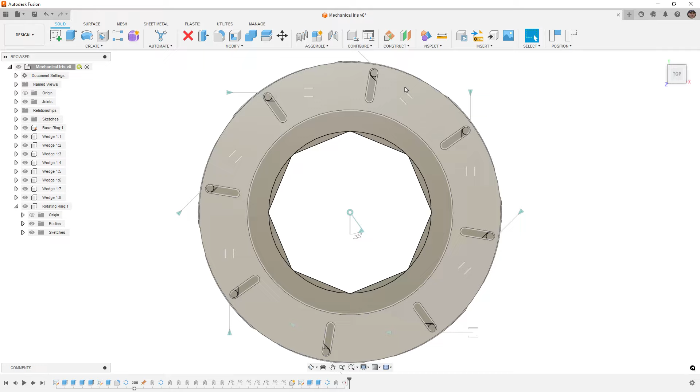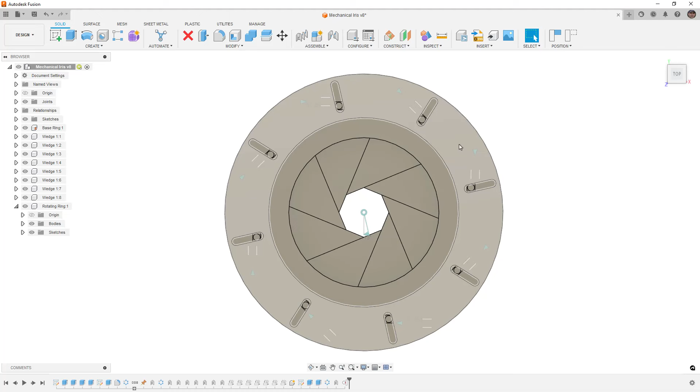This one is looking at these petals that sort of nest to each other. Some of them, like camera irises inside of lenses, will actually have these leaves or petals that overlap. And there are other kinds that have 4-bar linkages and all kinds of different things in it. I picked this one because this is probably the easiest to model and understand.

That way we're not so bogged down on having to worry about things like math and figuring out all these sort of arcs and motions. So we're going to make this one here, and if we want to in the future, maybe we'll make another one that's a bit more complex. But let's go ahead and get started with this.

So we're going to begin a new design. I'm working in the metric unit system. If you want to work in inches, perfectly fine. It's not going to make a difference to this design. Just adjust your values accordingly.

We're going to get started with a new sketch. And this is a part of the design that I get a lot of questions on. People ask kind of about workflow. Do you make all bodies and convert to components? Do you make all components early? And kind of it depends. And I say it depends because it does.

Now, there are different CAD programs. If we're using SolidWorks, for example, then if we wanted to do all bodies, we would do a master model inside of a single part file, and then we would save those bodies into their own files and into an assembly. That workflow is something that I've done for many years, and I actually enjoy it in Fusion as well, making the bodies and then converting them to components.

But there is, of course, a nuance there. If the components are going to be extremely detailed, and what I mean by that is if the features and sketches take up the entire bottom of the timeline and you end up having to scroll back and forth quite a bit, or if there's a lot of interdependencies, those are two main things that would drive my decision one way or the other. For the mechanical iris here, the geometry is simple, the number of features is fairly simple.

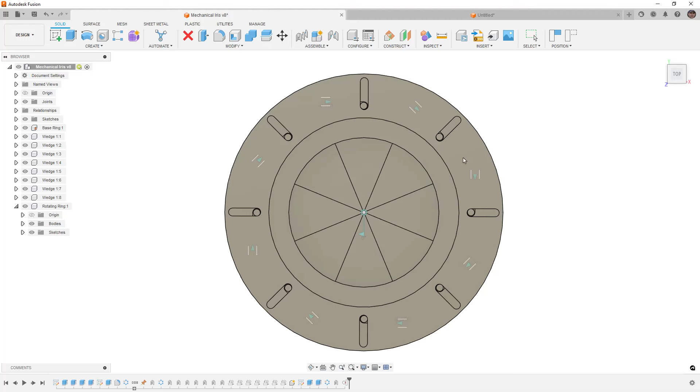So we don't need to go into making components early on. Is it going to affect what we do here? Not at all. You can certainly start out making components. I am going to begin by making bodies just because of the way that this design works. I think it's a little bit easier.

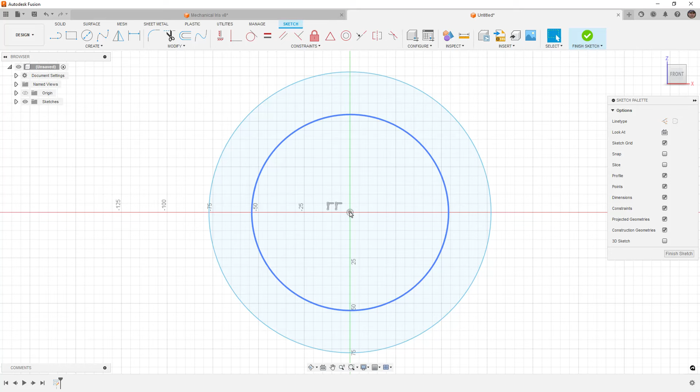So we're going to begin by creating a center diameter circle, and I'm going to create a second one, and we're actually going to hit escape, and then we're going to add some dimensions. We're going to start by giving the inside one 100 millimeters, and the outside one is going to have a distance between the two. I don't know what the numbers are that we need, but these wedge pieces or these blades need to be completely hidden inside of here.

So you can kind of plan and figure out how much space you need based on the fact that we've got essentially 50 millimeters here, and we need to completely hide that over in the side here. Now it's not one-to-one because we can't just take this distance of 35. If we were to have a triangle here, and what I'm going to do is I'm just going to make one here.

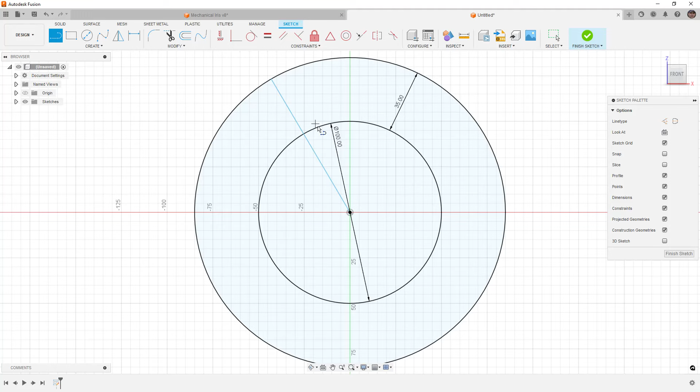I'm going to put a vertical line, hit escape, and make this construction. Now there are shortcut keys, X on the keyboard for that. Let's go ahead and select the left line, the right line, and the center. Select the center last and use symmetry.

This allows me to move these around. And then we're going to give these a dimension based on the number of petals or leaves that we want, so 360 degrees divided by the number that you want.

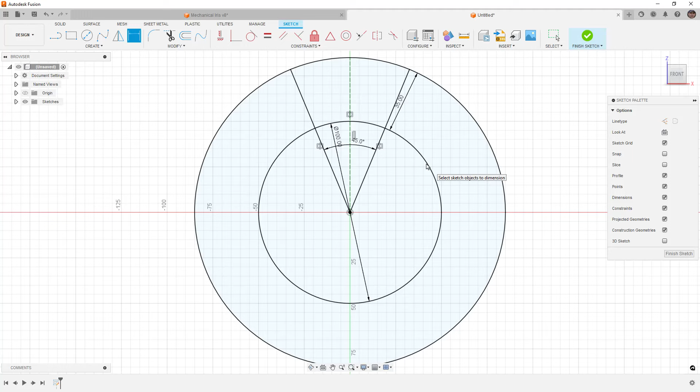I'm going to use 8 for this example. We could use more or less, that really depends on what you're doing. 8's a good number. The more you add, the more joints you'll have to add to make this work mechanically. The fewer you add, the simpler it becomes. So if you want an easier one, just reduce that number.

So now we've got this wedge shape, and what I'm going to do is select these two lines and hit M on the keyboard, which is move copy. I'm going to create a copy, and just drag this out to the left. So this is the direction that this piece is going to be moving, and what we need to think about is how far we're moving it.

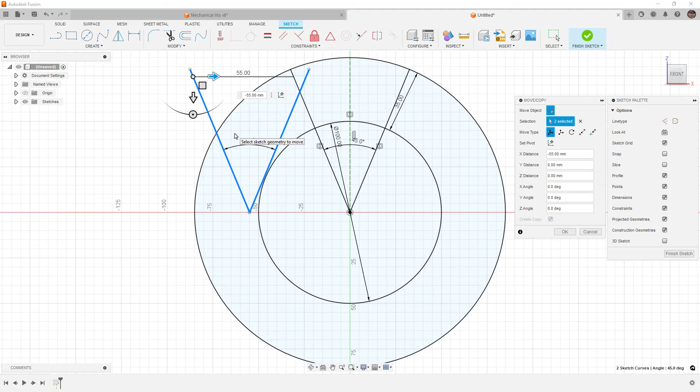In this case, it looks like 55 millimeters will completely hide it, and whether or not we can completely hide everything inside of that shape. We're not going to keep this, so I will be deleting it, but just keep in mind that what we're going to be doing is creating this wedge piece that's going to move off to the side.

Now, if I add another arc from here to, let's say, there, and I'll make these two concentric, basically that's going to give me that little wedge piece. I'm going to undo this. I just wanted to do that as a visual representation of what we're doing.

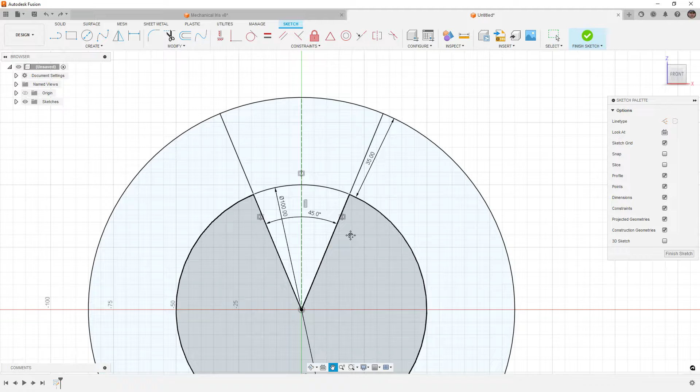Because we're only going to be working in this upper section here, these two quadrants, I'm going to zoom in a bit. So now this is our wedge piece, and it's going to be moving off to the left. To make that happen, we're going to add a slot.

So create slot center to center. We're going to go from this vertical line here and just off to the left, and I'm going to give it a value of 5 millimeters. It's going to be big enough for what we need. There's going to have to be a pin that fits between this wedge piece into that slot.

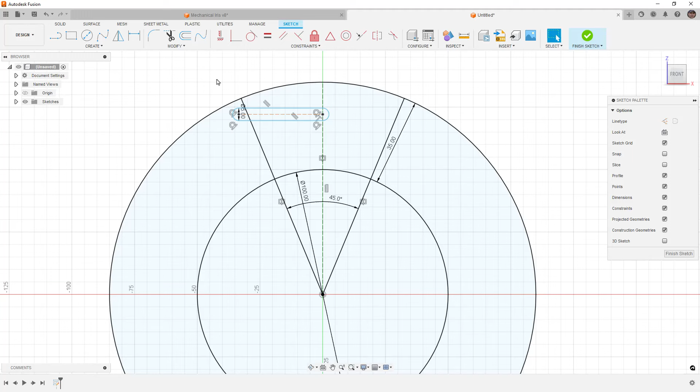Now, there are a couple of other important things that we need to think about here. I'm going to add a couple more circles, and hopefully this will be clear. From the origin to this point, and then the origin to this point, hit escape, and convert both of these to construction - again, X on the keyboard, or click line type construction over here.

Now, what I mean here is that this diameter is going to affect the length of the slot. It's going to affect how far that piece moves in and out. And these numbers are important because when we make our secondary slot for the top ring that's going to move, that secondary slot is going to go from this position and it's going to go vertically until it hits this circle. So that's how we get our two dimensions.

This left-right one is going to dictate how far that wedge moves left and right, and the vertical one is going to dictate the pin moving along this slot. So we're going to use one pin location to help drive this, and then the intersection between all of the other pieces to make this work.

So what we can do is define the diameters of these, again D on the keyboard for dimension, and I'm going to say 140 millimeters, and let's go to this one and say 160. I don't know if these numbers are going to work - we can always come back and change them.

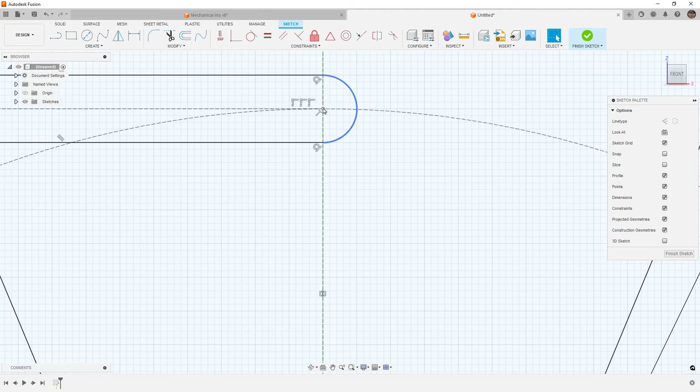And the last thing that I want to do here is add a circle, and we want to make sure that we're centered. So we're going to go at the center point here. We're not going to make it exactly the same - I'm going to make it 4.5 millimeters.

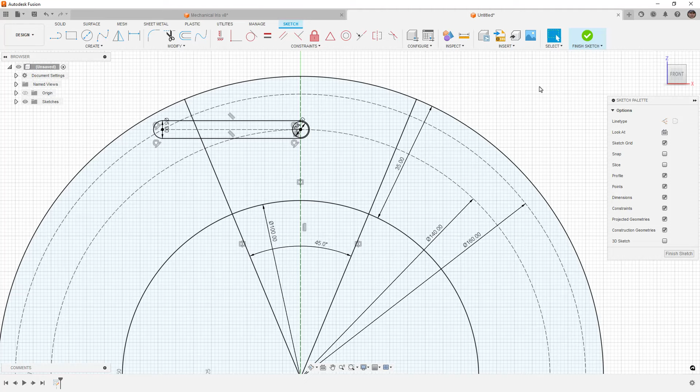If you were to 3D print this, or if you were to try to manufacture it, then obviously you need to think about the tolerances that you have available to you. If you're using a 3D printer, it's generally plus or minus 0.1 to 0.2 millimeters. My printer actually prints undersized a little bit, which can be difficult if you're trying to get things like hole sizes for bolts and pins, but those are the general numbers that we have to work with.

So now that we have this, we also need to think about the bit that we're going to cut away from the outside of this wedge piece. That bit, we're not really sure. Again, moving it off to the side 50 millimeters gave us a good idea of what that would look like. But I'm going to add a few more dimensions. I want to see what this travel is, keeping in mind that this is a driven dimension - basically we can't add this dimension, it's already defined. I also want to know what the outside diameter is as well. Once again it's driven, so now we know 170 on the outside and 38.73 is the distance.

So what that means to me is that if I take an arc and I go from here, it's probably not going to come up to that corner, but somewhere around here. What we want is this radius and this radius to match so we can make them equal.

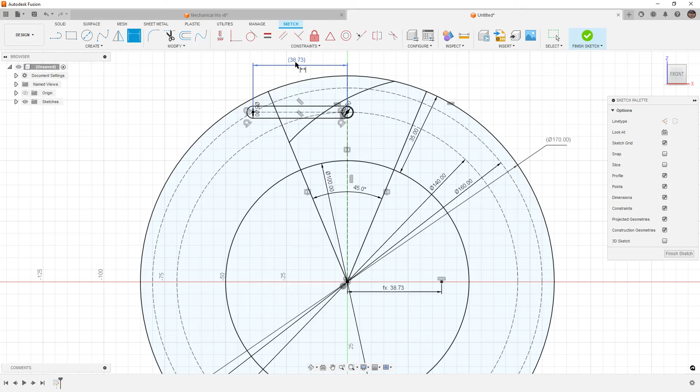I'm going to hit escape, and then we're going to drag it down. Then what we need to do is figure out the distance from this origin to that point. So if I select this point and select the origin and make them horizontal, and then use D on the keyboard to figure this out, this value should be approximately the same as this value, 38.73. What we could do is click on it and set those equal. Even though this one is driven, that is going to automatically update that little wedge piece.

Now we'll have to do some testing and figure out if it actually will work in reality, but this is where these numbers are coming from.

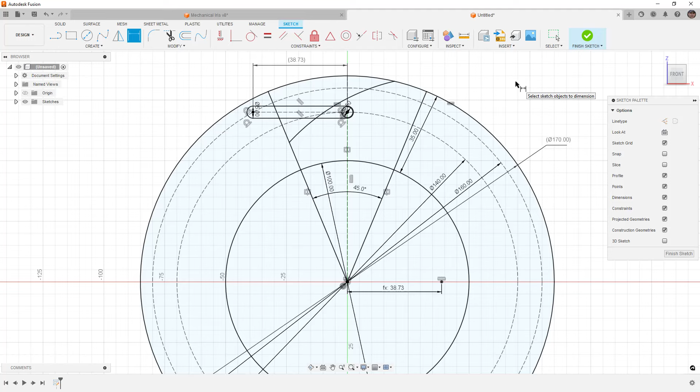Now, I know the sketch is a lot, but for me, at least as I'm designing things like this, it's easier to put a lot of this in one sketch because we can move and copy bodies around or copy these sketch lines around and give us a good idea. We'll have to come back and make the ring, the sliding ring, in a separate sketch.

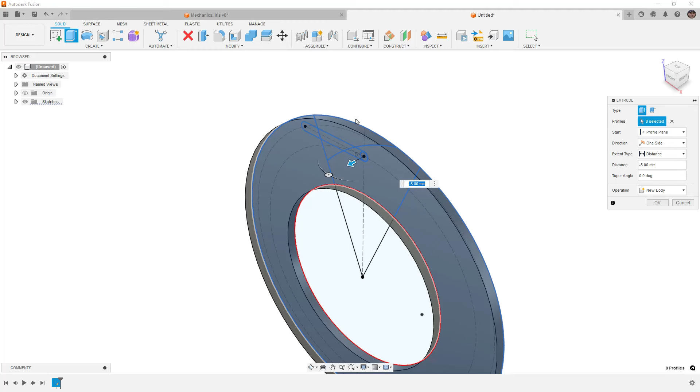But we're going to start by sort of shift selecting everything and then we're going to extrude it. You can use E on the keyboard. I'm going to pull this forward - let's go ahead and just do, I don't know, -5 millimeters.

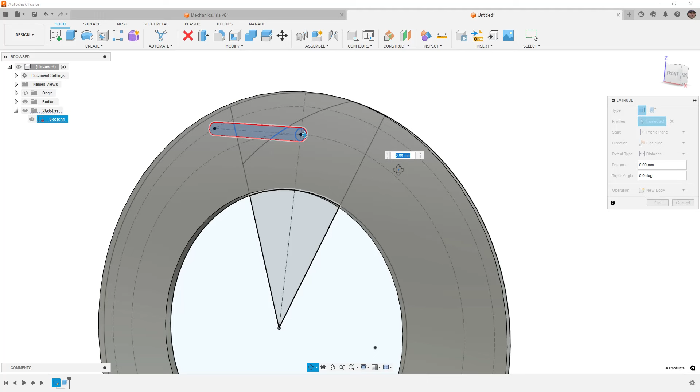Bring the sketch back, and now we're going to cut the slot in it. The reason that I like to do it this way is because it makes patterning the feature a bit easier. You don't have to do it this way - you could pattern the faces and it would work just fine if you wanted to just do that single extrude. But I like to keep these things a bit separated, even though it adds more features to the timeline.

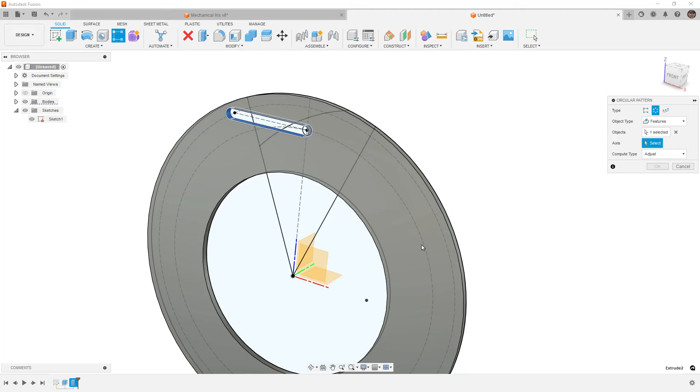We're going to do through all, say OK, and now we can pattern that. So we're going to do a circular pattern of features. We're going to select that extrude cut feature, and we're going to pattern it about the y-axis, so we can either select that or a cylindrical edge. Then we're going to add the number of pieces we need. Again, depending on how you define that wedge piece, whether it's 6 or 8, that's how we're going to get those numbers.

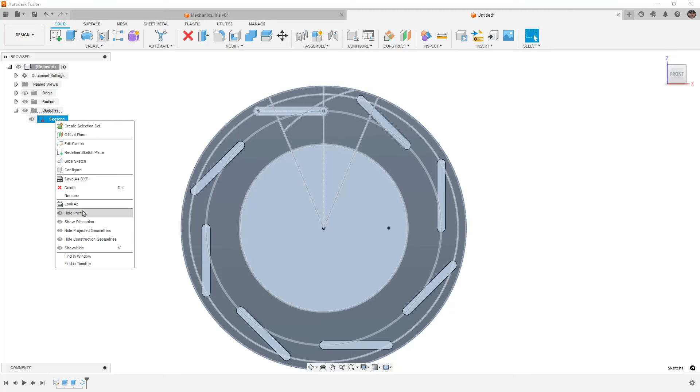So if we go back to the sketch, right-click and show dimensions, this dimension here was 360 divided by 8. That means that we're going to have 8 of these wedge pieces. So that's why I chose to pattern this 8 times.

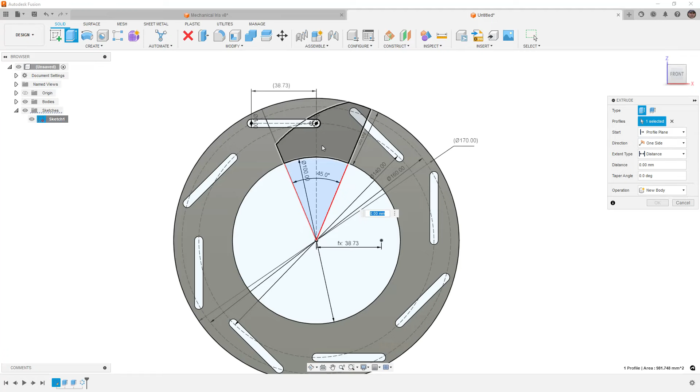The next thing that we're going to do is we're going to extrude that wedge piece. So again, E on the keyboard. I'm going to hold down Control, and we want to extrude all of that. I'm going to make this go the opposite direction.

Keep in mind, when we're designing this model, if you were to actually make this, there are more pieces that you would need to do, right? So we're looking at the kinematics, the mechanical motion of this part. We're not putting all the little details together to actually make it ready to be printed. If you want to carry on and do that yourself, you certainly can. It's not much more than we're going to do, but it will just make the video quite a bit longer.

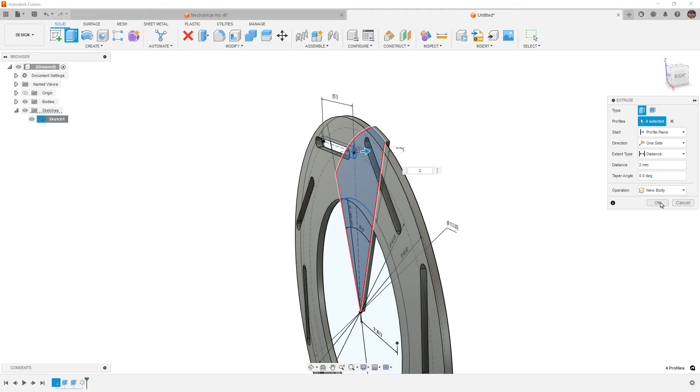So we're going to make this a new body. We're going to hit E again for extrude. Also, you can use the right-click marking menu, and the 12 o'clock position is repeat. So I like doing that, especially if I'm doing something over and over again that doesn't have a shortcut.

You just hold the left mouse button down and drag up. That's a quick way to get back to that extrude feature.

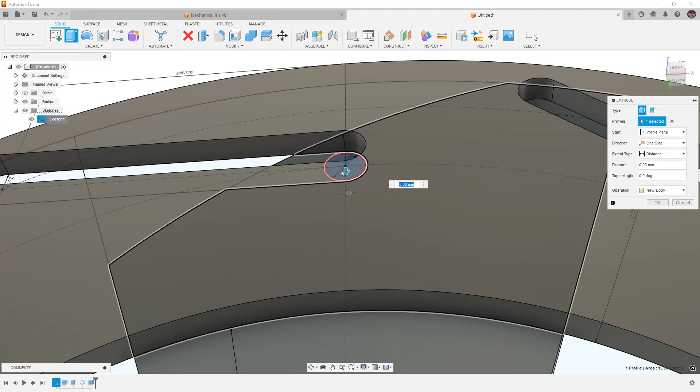So this pin is going to come up, and I'm going to make it come up 8 millimeters. That'll allow it to go into the next ring. And because it's undersized, it's not going to try to join it to this body. But one thing I would caution you in Fusion is if you're going to be joining features together, then make sure that you hide any of the other bodies you don't want to connect it to.

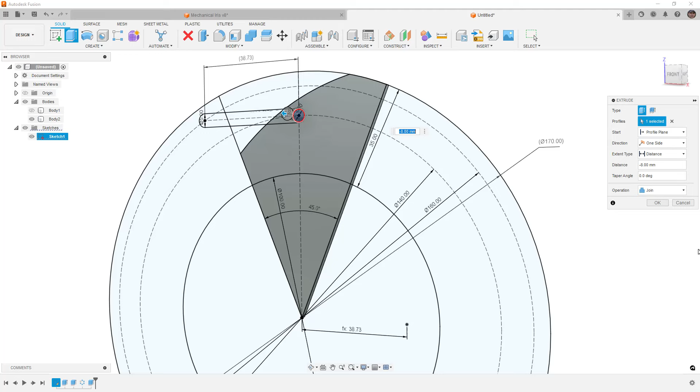So we're going to say OK there. And we'll bring that body back and hide the sketch. At this point, I want to add a couple of fillets. Maybe we'll get this edge, and that one, and just round them off. They don't need to be extreme, we're just going to kind of cut the edges a bit.

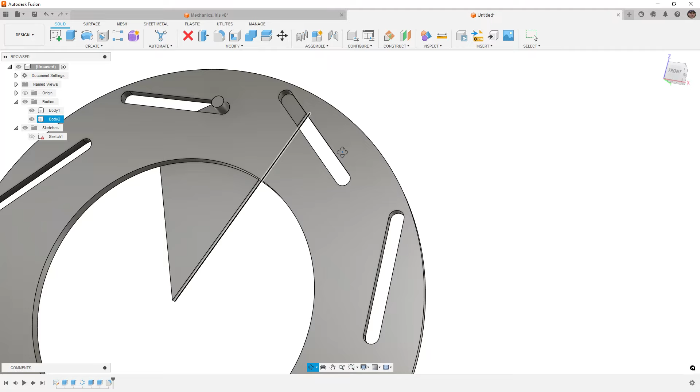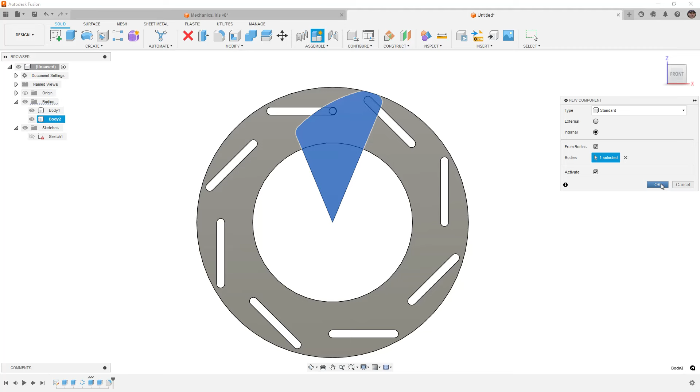Now we want to kind of test it out. So this body here is going to be stationary. It actually does not need to be a component. You can convert it to a component and pin it or ground it. They changed the name of ground to pin now. But this one definitely has to be a component. So we're going to just start by converting that one to a component. And we'll say OK, and then we're going to add an as-built joint.

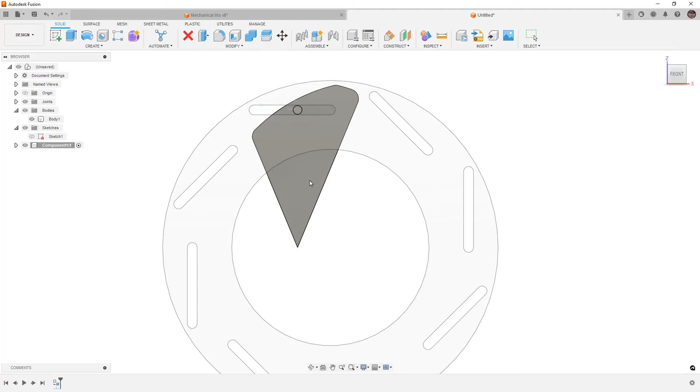So we're going to use a slider joint between this and along this edge here. Currently, it's completely open, there are no motion limits, and I'm going to leave it like that for now because I basically want to evaluate what's happening here. So because we use the numbers, we can see as we pull this all the way to the outside that it is matching the outside shape. That's perfect, that's exactly what we wanted.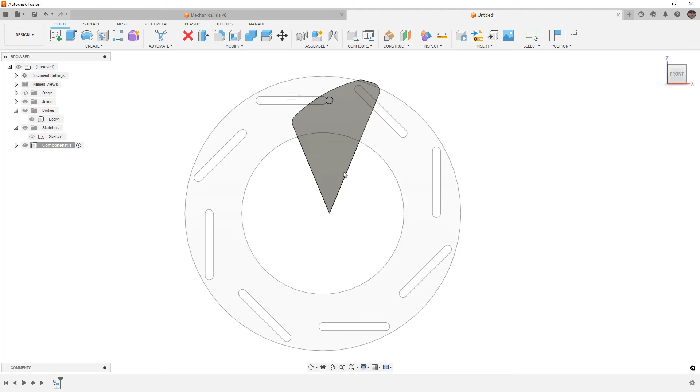However, it's not hidden inside of this inside diameter. Because of that, what that tells me is that we need to make some adjustments to this sketch. Keep in mind that this 35 millimeters is an offset distance, it's a distance between the inside diameter and the outside diameter. The outside works great how it is. So anything I do to change the inside diameter, this 100 millimeters, I want to add back to this so that it still equals 170. Even if it doesn't, we can use these reference numbers to make things equal.

So what I'm going to do is I'm going to change this to 90 millimeters. And now you can see the pin is kind of just hanging out on the outside of this, which means that if I try to move it, you can see the slot is now sort of outside of here. So we don't want to do that, we want to make sure that we repair those things.

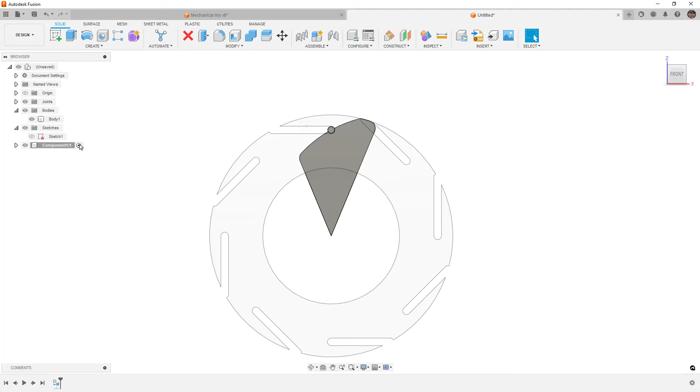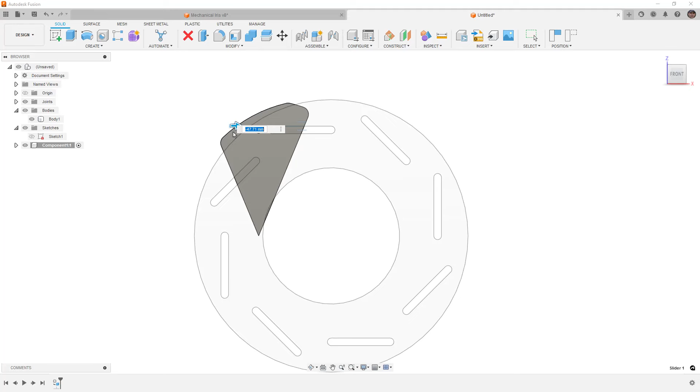So I'm going to add 10 to this and make that 45 to make it a bit bigger. Again, part of the reason for that is now if we drag this to the left, you can see that we're getting closer to hiding this. Again, it becomes sort of this tricky game. We can go further now with these numbers until this position, and it's really hard to see, but if we double click on the joint here, it tells us that we've moved 47.71 millimeters. So that is going to get us really close to exiting, going about 48 millimeters.

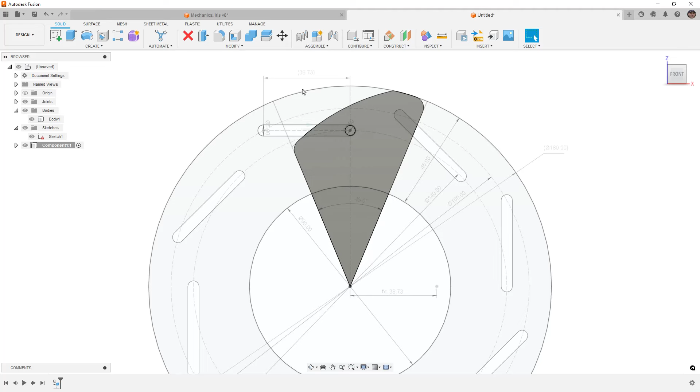So what we're going to do is revert our position, bring back that sketch. Remember, right now it's sitting at 38, and the reason it looks like this is because that new component is making everything look, changing the opacity. So we want to go about 48 millimeters, which means that this diameter, this outside diameter of 160, needs to increase. So if we make this 170, it now takes us to a little bit over 48 millimeters.

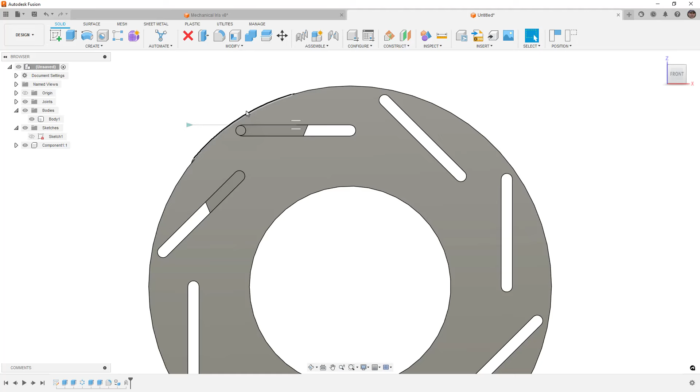So now if we take this wedge and drag it to the side, it looks like it's just about completely hidden. You can see there's a little bit more in there. What we could do is we could shave off the outside a bit more, but this is now, we're now at a position where we've got good numbers.

So now I can go back to the joint, I can edit the joint, and I can say min and max. Now, when we have min and max values, we have to look at the arrow direction. It's pointing to the right, so that means I'm going to have minus 48 millimeters, and it's going to stop in those positions.

If the arrow is pointing the other way, then the min would be 0 and the max would be positive 48. So you just kind of have to look at the arrow direction, and that all depends on the selection when you add that joint. So everything's looking pretty good so far.

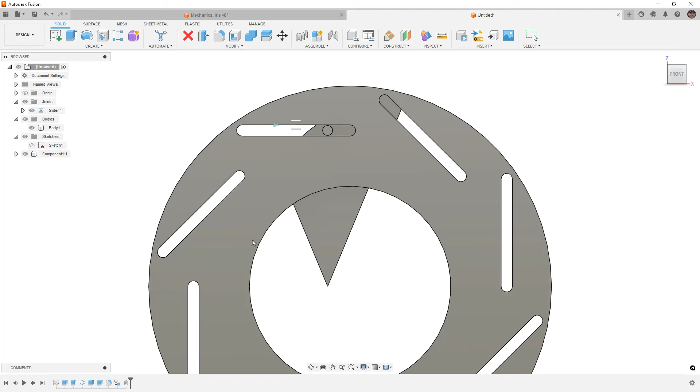Now we can pattern this component. So what I'm going to do is go to Pattern, circular pattern of the component, about a cylindrical axis, or we can select Y.

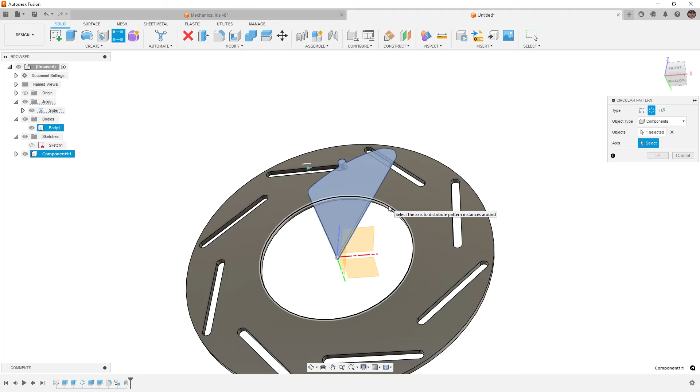Fusion doesn't really care if you make changes to the geometry because everything we do is based on a timeline. That's not true in other CAD programs. If we were to do this in SolidWorks or Inventor, for example, the assemblies don't have that sort of history, so it would have a problem if we went back and added a chamfer to that edge.

So we're going to go to 8, and now we've got all 8 of these here. The problem we now have is we have to add this joint to all of them.

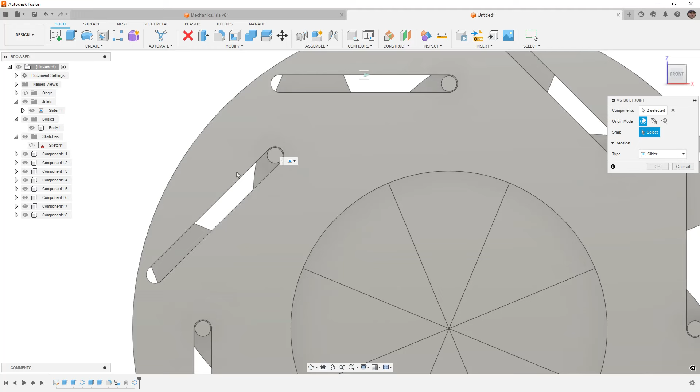So to do that, we're going to go to Assemble, As Built Joint, because everything is in the correct position now, and we're just going to start plugging them off. So this one to this one, and then select that midpoint. Right-click into the right position at 3 o'clock, and OK. Then again, 12 o'clock position. We're just going to work our way through.

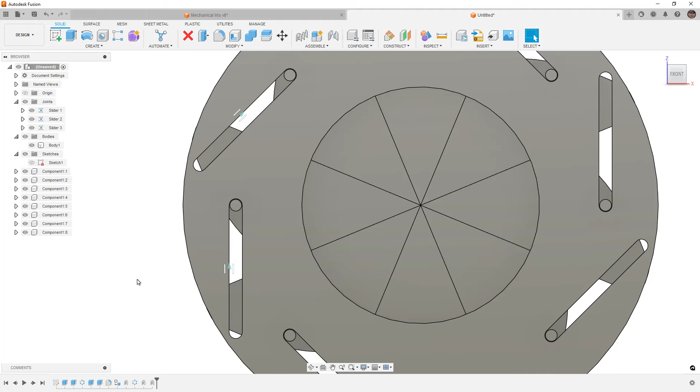You can see it's going the wrong direction, and that's because the selection for the snap, the arrow is pointing in the wrong direction. So to the right, 3 o'clock position. Then we're going to go here and make sure the arrow is pointing the right way. If it's not, just reselect it. It can be a little bit tricky if you don't rotate it, so sometimes it's good to just rotate it.

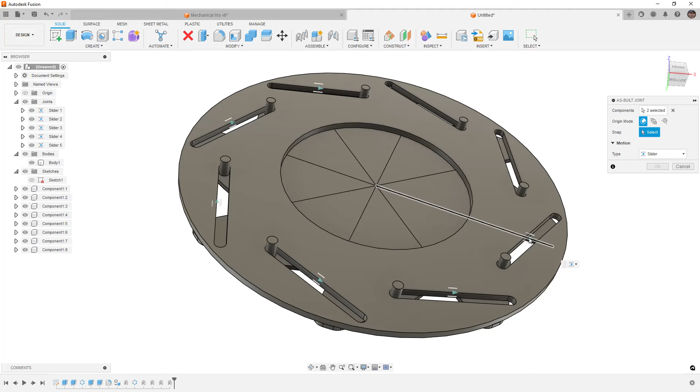And again, that right-click marking menu, just repeat the joints. We're going to go from here to here, so right-click, repeat as-built joint. This one to here, select your slider position, and just work your way around. Once you get comfortable with using the marking menu, it really does speed things up quite a bit. We just need to work our way through, and the last one here.

Now, the next thing you're probably wondering is how do we actually get them all to move together? Because right now they all move like they should. I did not add any limits to the rest of them, and that was for a specific reason. But now the next thing that we need to do is we need to add what's called a motion link.

Now, something I do want to caution you about here is look at the direction of each of these joints. So this arrow is going to the right, that one's going to the right, that one essentially is going to the right. This one switches directions. So you can see these ones over here switch directions.

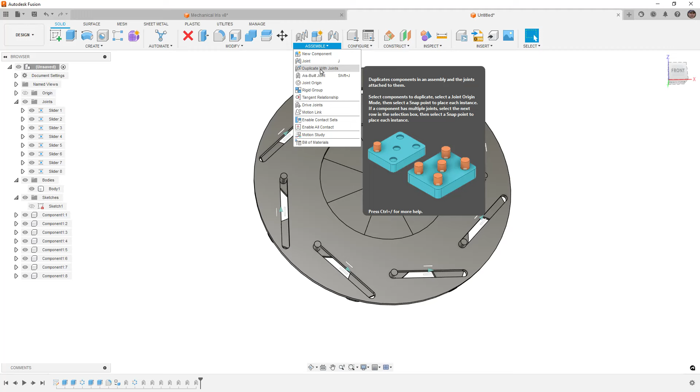The reason that's important is because when we add our motion link, which connects two joints together, these two—clicking this one and this one—these two go the same direction. That means that the joint limit on that first one is going to limit the second one, so I don't have to go through the process of tweaking that joint limit. That reason is important because if we make dimension changes to any of this, we don't want to have to edit 8 joints to edit that motion link.

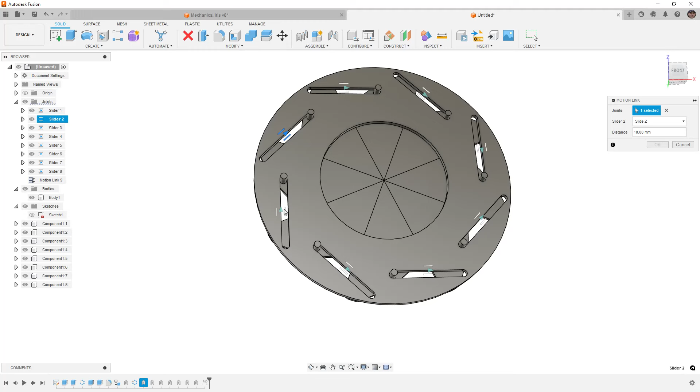So we're going to do a repeat, and we're just going to work our way around. As long as the arrows are facing the same direction, it's fine. Where you start to get into trouble is when they face the wrong direction. So if the preview animates improperly, you want to click reverse and make sure they're all going the same direction.

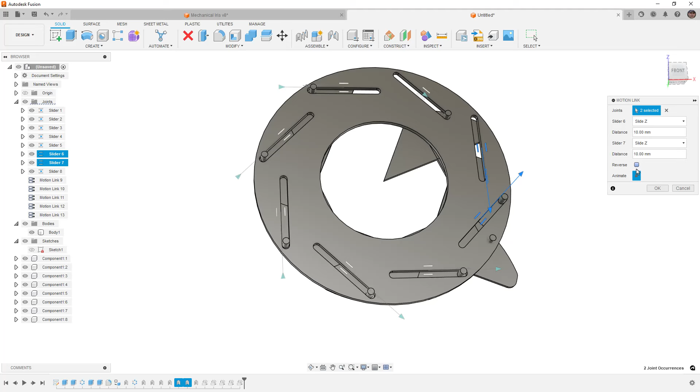Again, right-click marking menu, we're going to go from here to here. These two arrows are pointing the same way, so it's fine. And this one is pointing the same way, so it's fine. These two are opposite, so we will have to reverse the direction. And then we've got the last one here. These two are the same, so everything should animate properly.

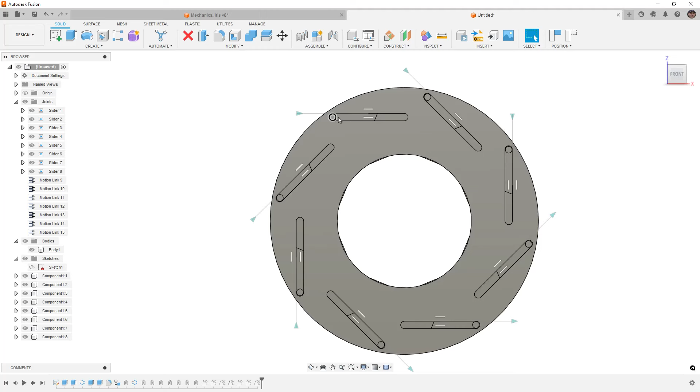So at this point, we have the mechanism to where we can slide this pin and we can open up everything, and you can see that it completely hides, or almost completely hides, and then it comes all the way back. So that's the bulk of how the motion works. But obviously in reality, we don't have something like a motion link.

What's going to end up happening in reality is that these pieces can just move on their own. They're not constrained. They can rotate and sort of move on their own. So the rotation is a little bit of a problem.

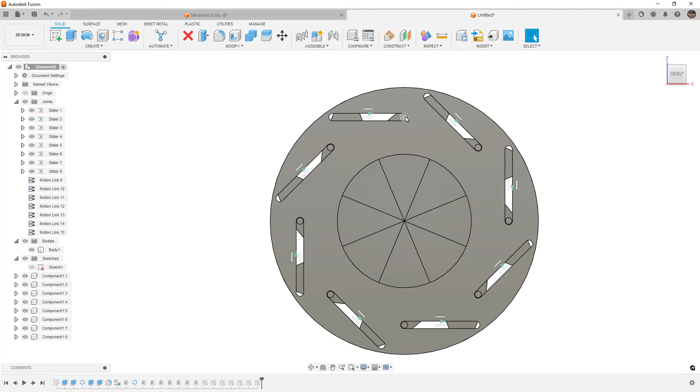The way that we would fix that is by adding a secondary slot, having two slots, or instead of making this round, making it square. Making it square would ensure that it doesn't rotate as it slides along the slot. But for the purposes of our video, since we're not going into the details to physically make this,

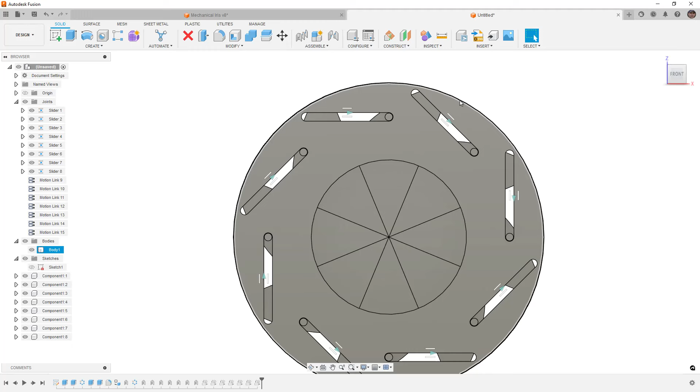this is going to represent the mechanical motion. The next thing that we need is another component that we can rotate. Before I get into that, I want to create a new sketch on this face here. I'm going to use a circle tool, and I'm just going to add something at 110 millimeters.

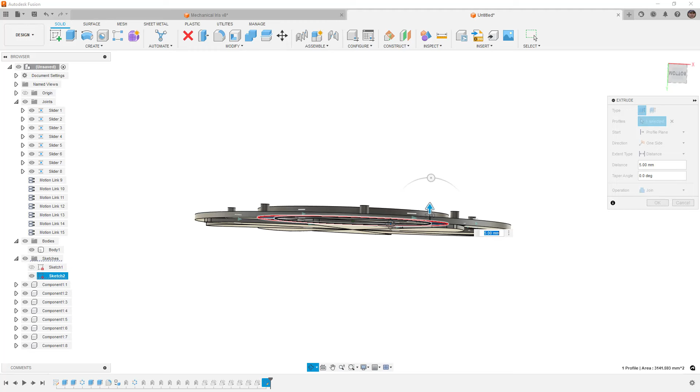And I'm going to extrude this. So E on the keyboard, and we're going to pull a little ring up. This could go the other direction as well, depending on how you want to orient this.

When we click join, we do want to make sure that everything still works. This, remember, is just a body. We didn't make it a component, and everything does still appear to work. So let's go back to this front view.

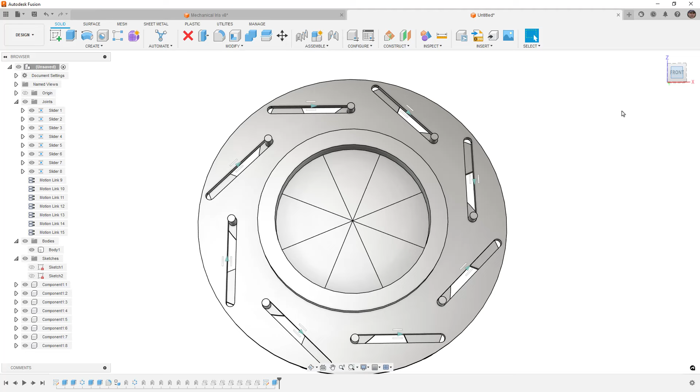So now let's create a new component. This new component is going to be the ring that spins, so I'm just going to call this spin ring. Pretty simple. The spin ring is going to be based off of this face, so I'm going to click on the face, right click, and create a sketch.

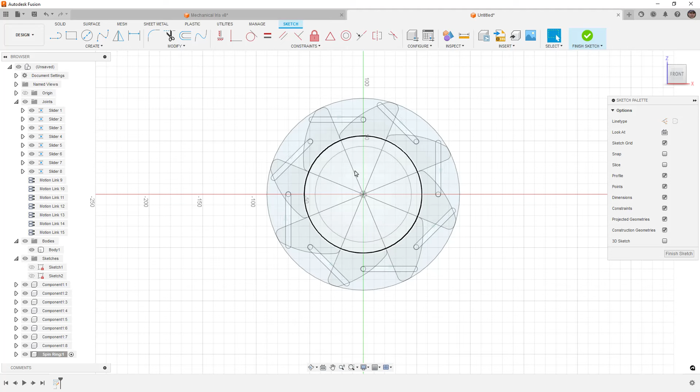However, everything that's here, I want to make construction. I don't want to use any of it, except I want to have those references here. So this ring is going to be here. I'm going to go ahead and take that one back. This outside one, we can keep the same if we want. And we want to create a slot that goes from this position to that vertical position.

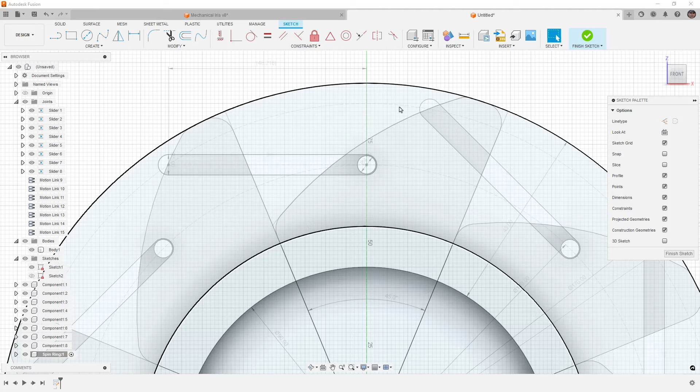So we need to bring back sketch one, and I'm going to select this line here and project it. You can use P on the keyboard, or go into the create menu and project it. Again, construction—it's already there, so when we click on it, we have to hide sketch one, and then we can turn this one into construction.

If you ever run into that, if you have problems making the right selection, you can always hold down the left mouse button, and that's going to bring up this selection, which will allow you to pick which sketch arc you want. There's also this parent-child menu here, which basically tells you that it belongs to sketch one.

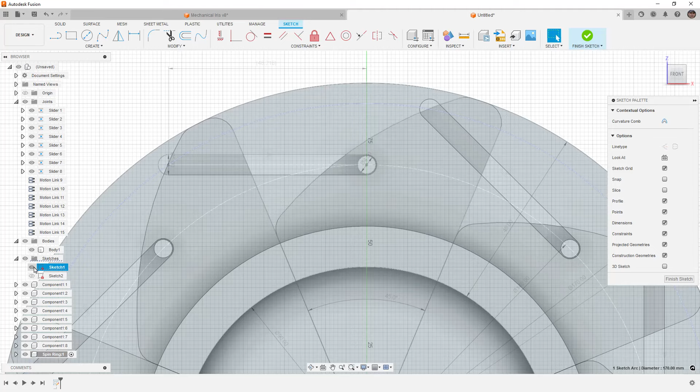So we're going to go to create, slot, center to center, go from this position up to this position, and we're going to give it a 5 millimeter dimension and finish our sketch.

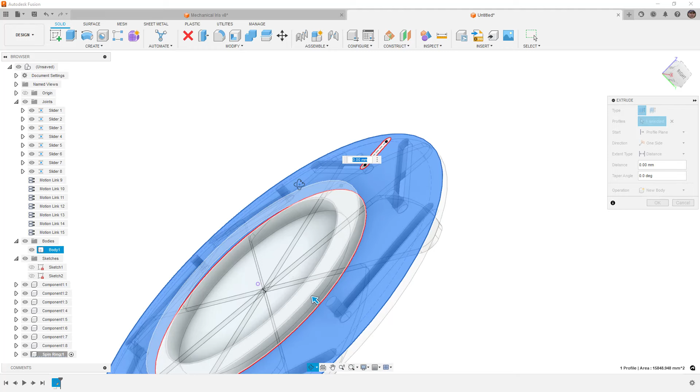So this time I'm going to do an extrude. I'm going to leave that hole there, and the reason for this is because I'll show you how we can do a pattern just with the face instead of the feature. So that looks okay. This is going to be a new body inside of our component.

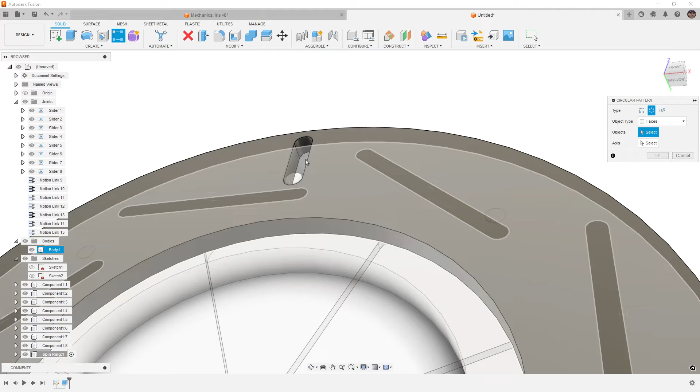And then we're going to create a circular pattern based on faces, and we'll select these inside faces here, making sure that we're grabbing everything, all 4 of them. And that's going to be about the y-axis or a circular edge. And of course, it's 8.

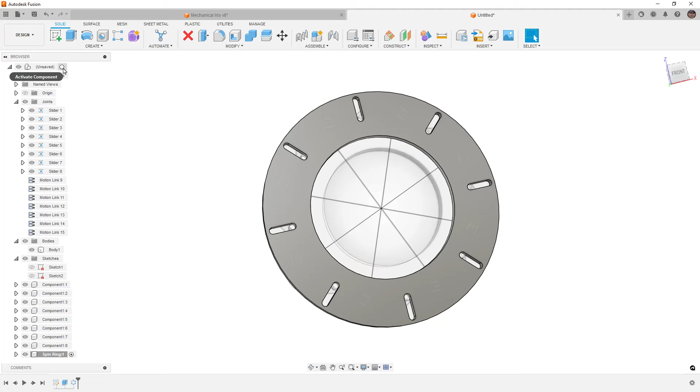And there we go. The next thing that we want to do is make sure that we've got an appropriate joint. So this one's going to have a revolute joint because it's going to rotate. We'll go to as-built joint again because it's in the right location—revolute between this and the base. And it's going to rotate about that center part.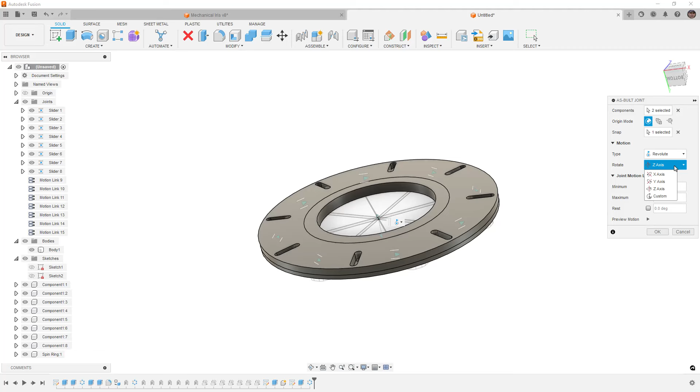You can see that selection is not correct. So we want to make sure that it's revolving about the z-axis. And we'll say OK.

Now here is where things get a little trickier. You would probably want to do a slot joint for this pin and this body here. The problem is, while that works in reality, Fusion does have some difficulty making that work. So we've got two main ways that we can get around that.

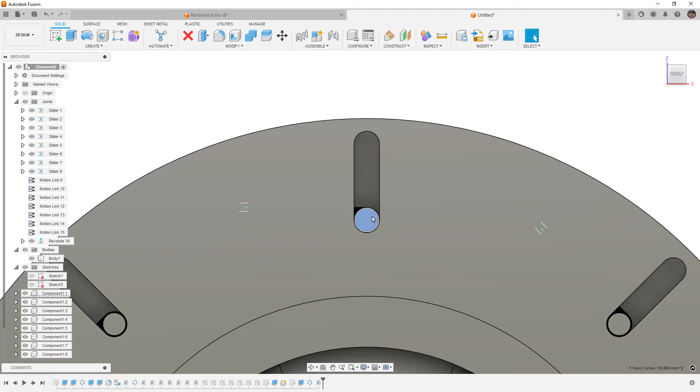We can either turn on our contact sets, and what that's going to do is look at all the solid body contacts between this pin, or really this wedge, and this body here. That works fine, but it does require some computing overhead.

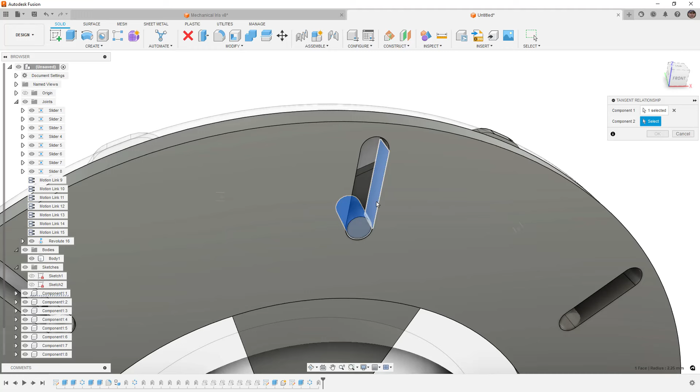The probably easiest way to do this is to use tangent relationships. Basically what we're going to do is say that this face here maintains tangency with this. Because the circular part, the semicircle here, is an extension of that edge, this will be just fine. We could add additional faces if we needed to, but this is going to work for us.

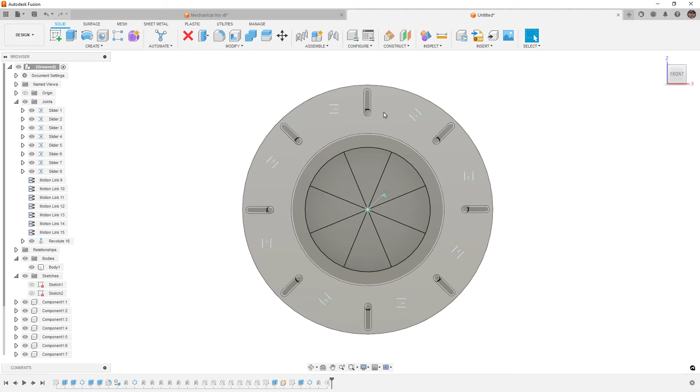So if we did everything right, I should be able to turn this and the iris will open. Let's give it a shot. As I pull it to the left, it's opening the iris, and it's going to stop right there.

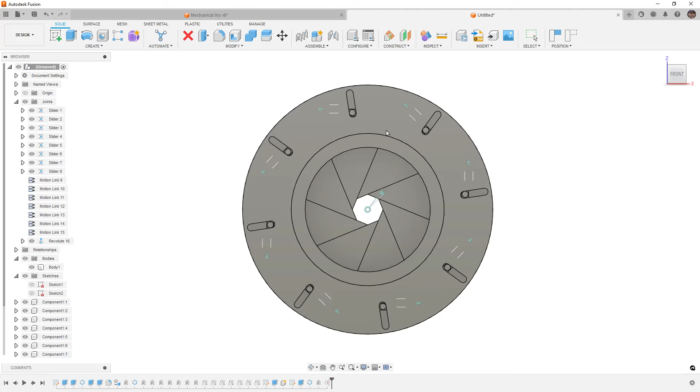Even though the only thing controlling it stopping is the limit on this one slider joint, everything else is controlled by that one slider joint. What you can see is the tangent relationship is keeping the pin on the edge of that face, and depending on how we move it, it might actually jump to the other side. Once it gets over here, it carries on because that slot has tangency. So it might jump back and forth, but again, we're talking about 4.5 to 5 millimeters, so a 4.5 pin, 5 millimeter slot.

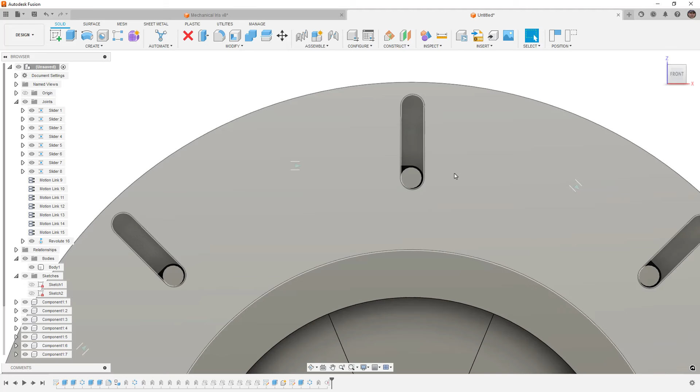So let's do something a little bit more here. On the slip ring, or spin ring, I'm going to right click, go to opacity control, and change it to 30%. I'm also going to turn on inspect and component colors. This looks a bit crazy.

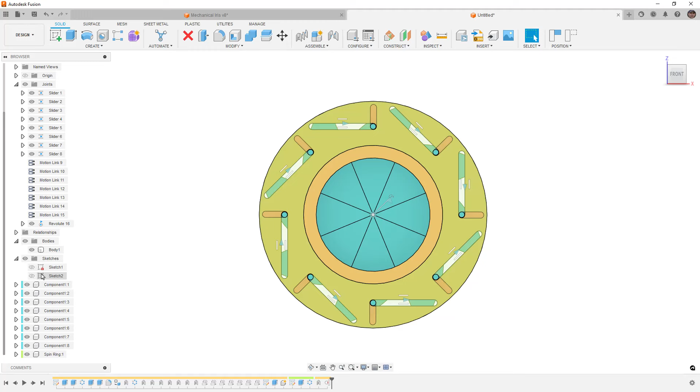All of these are the same color because they're copies or patterns of that same component. But everything else, the green and the orange, which are honestly a little hard to look at, I'm going to right click up here and cycle that color to get something. It's not much better, but it's okay.

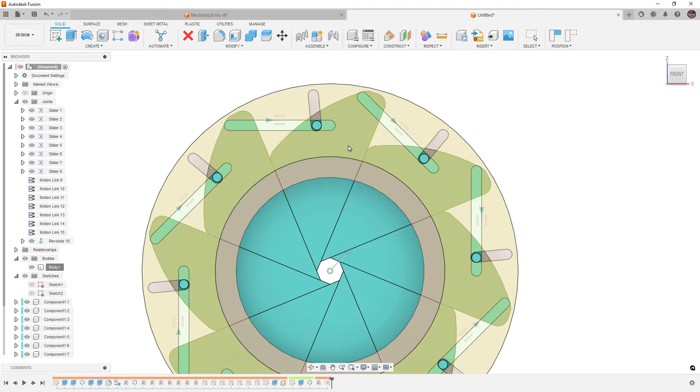Basically what we want to do is look at what's going on here. So this other body, right click, opacity control, I'm going to turn that down as well. The pin that we have on each of these triangle wedge pieces is fixed into two separate slots. The left-right slot goes from this inside diameter to this outside diameter, so as we rotate this around, it's traveling along that.

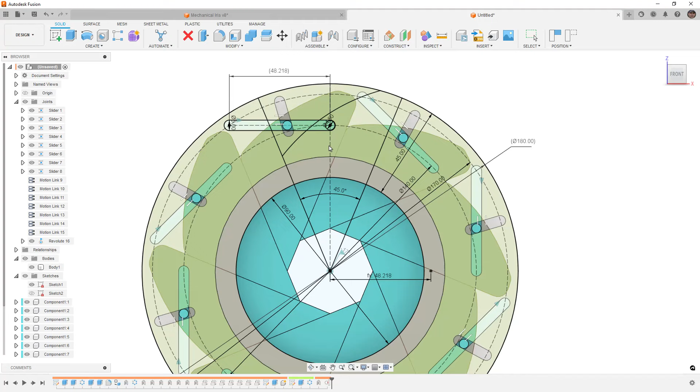The vertical slot that we created also travels along that inside to outside diameter, except it's doing it vertically. So one's going horizontally, controlling the motion of the wedge piece, and one's going vertically, giving us that other limit here. So this, mechanically speaking, was probably the most simple version of this mechanical iris.

The other types require a little bit more math knowledge and a little bit more finesse. But overall, that is the process to create this mechanical iris.

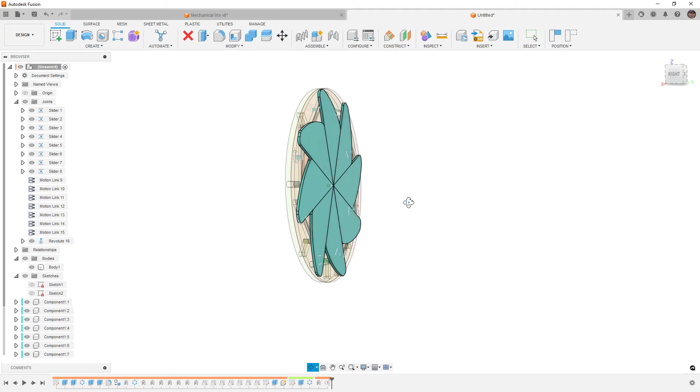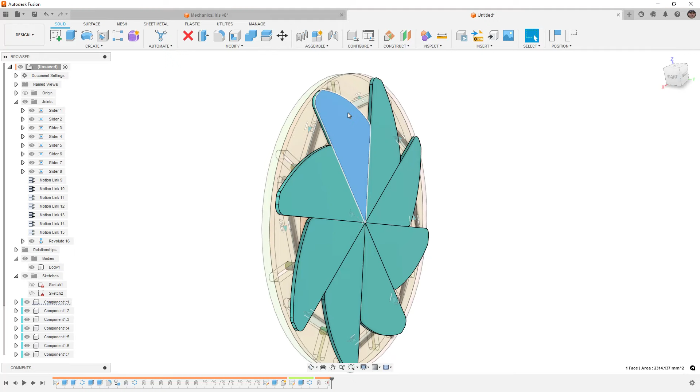Now, there are more things that you can do. I've already mentioned that this, as it stands, is not ready to be manufactured. But if you were going to try to make a 3D printed version of this, I would suggest that the spin ring goes on the back side to hold in the iris, and you simply extend the pin from this side through to the other side, and it'll still work the same. These slots also don't have to go all the way through; they can be hidden so you don't actually see any of that. But mechanically speaking, you would still need to spin the outside ring in order to get that motion.